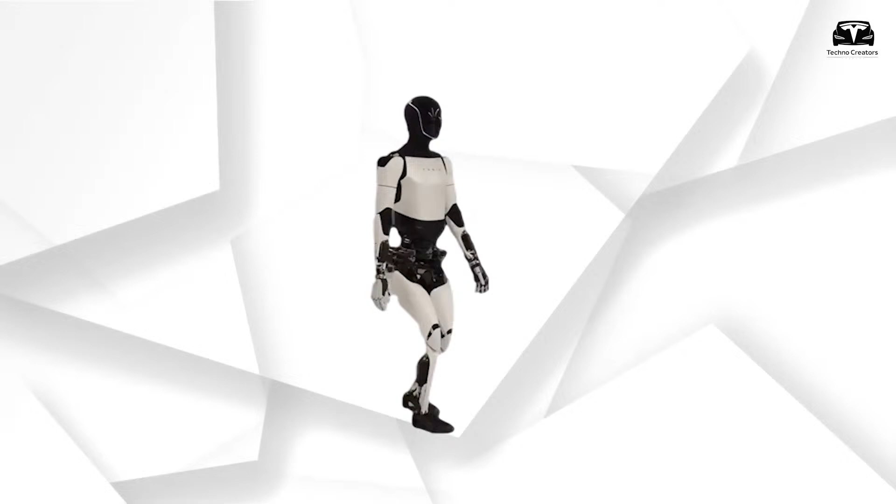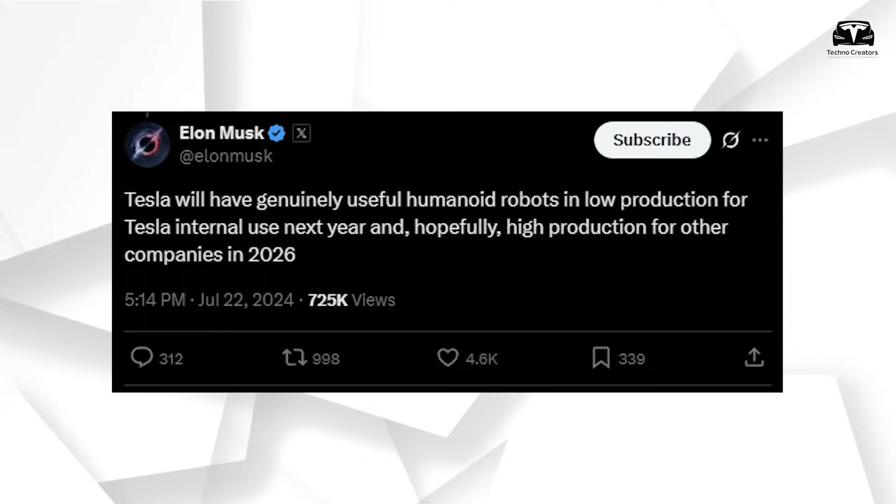Tesla Bot Optimus, an ambitious product with the potential to be a financial game-changer for both Tesla and the entire market, is continuously touted by Elon Musk, who confidently claims it will be available for sale by the end of 2025 and speaks optimistically about mass-producing robot legions. However, harsh reality seems likely to limit this goal. When will Tesla actually be able to begin mass production of the Tesla Bot?

In today's episode, we will reveal 3 major reasons why Tesla is being forced to delay mass production, and the truth behind the scenes. And welcome to Techno Creators.

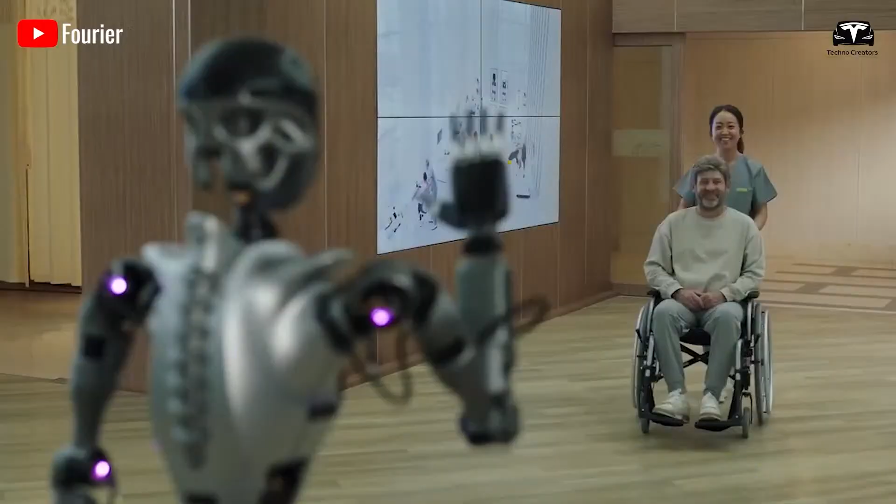The new hardware cannot be produced for mass production. Although Tesla's greatest strength lies in hiring the smartest engineers in the world and motivating them to work at an incredible pace. If we go back to 2016, Tesla published a blog post stating that all of its electric vehicles were equipped with the necessary hardware to achieve full self-driving. This meant that owners of those Teslas could expect autonomous trips and eventually even send their cars out as robo-taxis to earn money when not in use. Later, Tesla quietly deleted that post, and now we can see why.

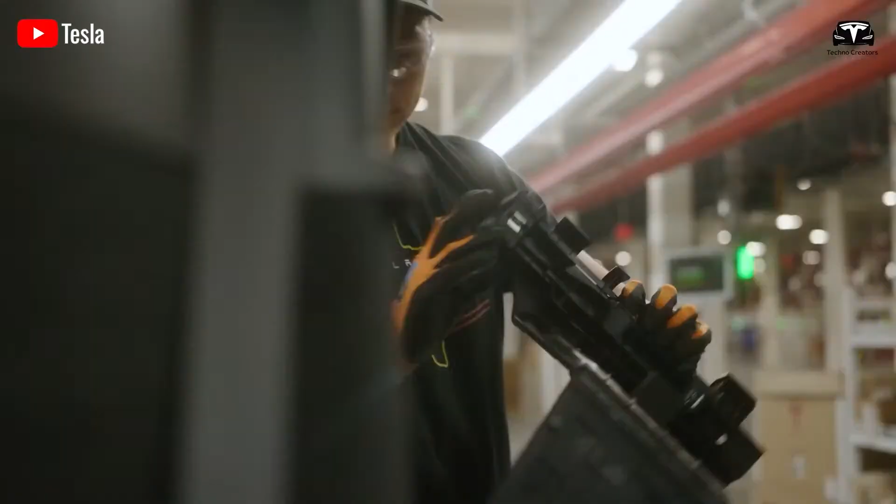Since then, Tesla has shipped millions of updated Hardware 3 computers to replace older Hardware 2.5 systems, as they were not capable of achieving FSD. Now Musk says even those newer chips will also need to be replaced. Meanwhile, the newer Hardware 4 computers have been experiencing short-circuit issues, which have led to large-scale recalls in both the United States and China due to related symptoms such as malfunctioning rear-view cameras.

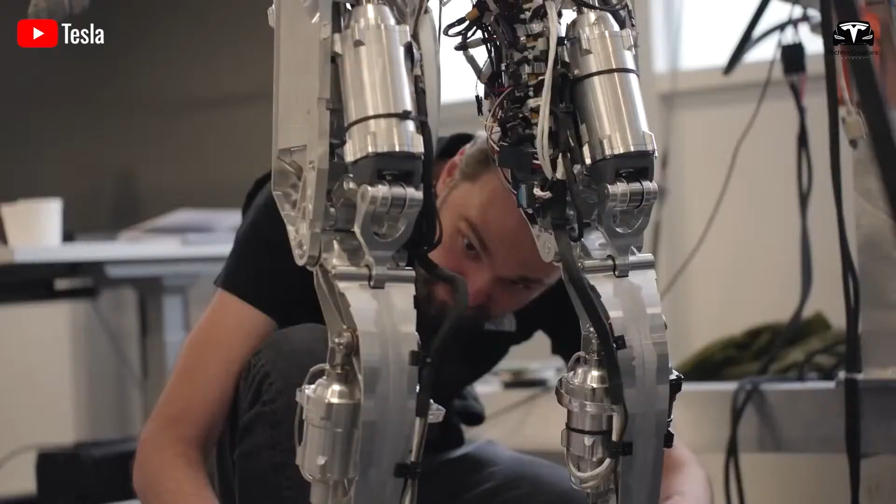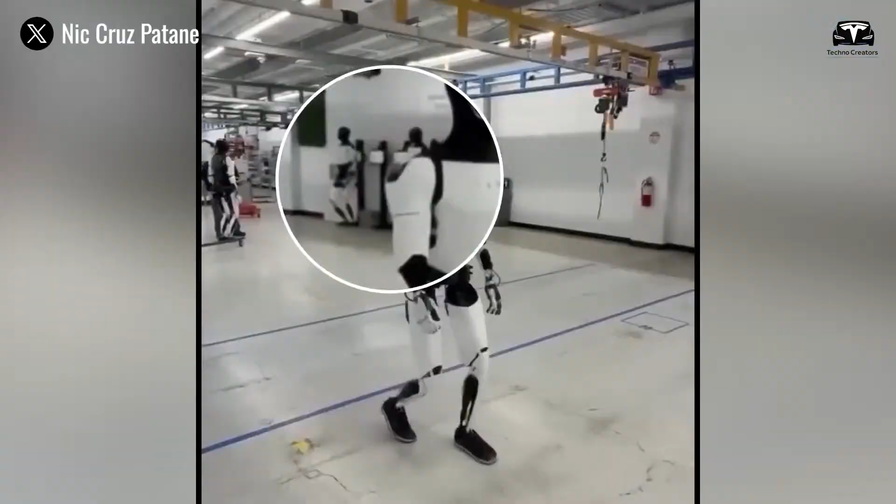Currently, the company is developing Hardware 5 for the Optimus robot. Tesla's 50,000 GPU training cluster at Giga Texas, named Cortex, has enabled a breakthrough in the computing hardware equipped on Optimus, with major improvements in safety and comfort thanks to 4.2 times more data, higher resolution video input, a 2 times reduction in photon-to-control latency, and a redesigned controller, among other enhancements.

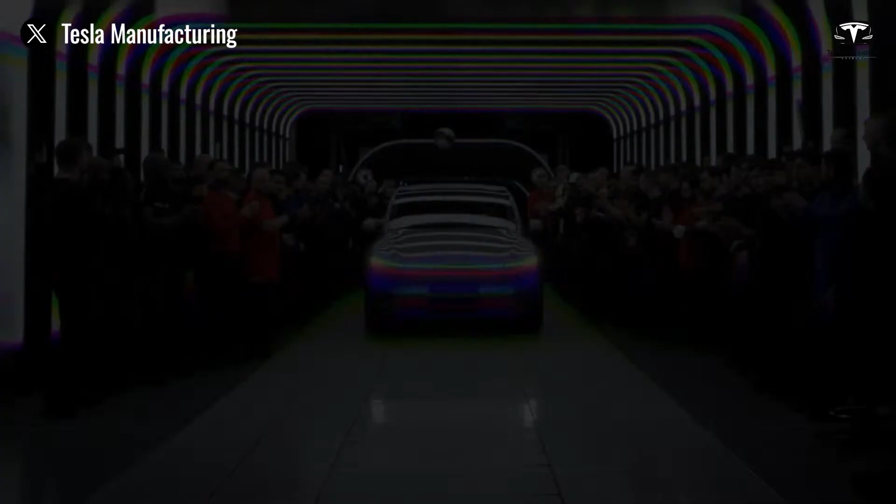Mass producing this hardware for Tesla Optimus is no easy task. Tesla still has many ambitious plans for its electric vehicles, especially the upcoming Model 2, which will require a significant amount of hardware dedicated to self-driving capabilities. The new hardware developed by Tesla specifically for Optimus is expected to be manufactured using a 7-nanometer process and will serve multiple functions, including autopilot and full self-driving.

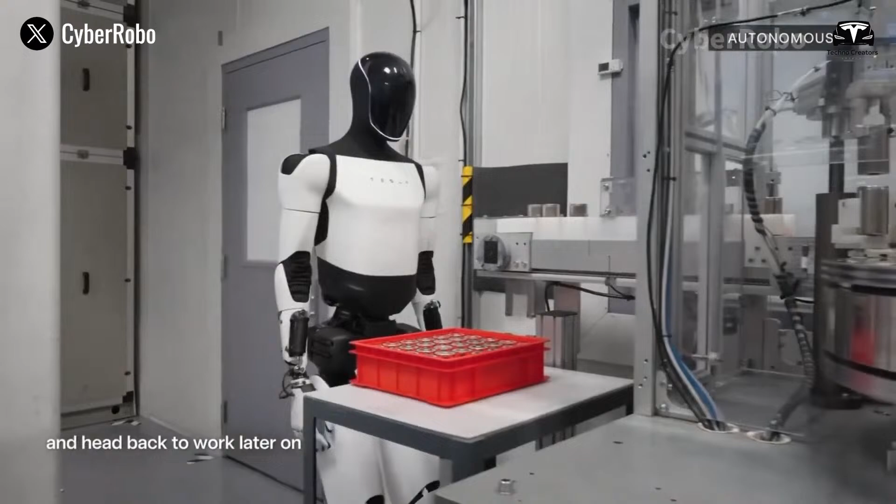Additionally, Musk has stated that while Hardware 3 was revolutionary, Tesla has been working on a next-generation chip that will be approximately 3 times more powerful than Hardware 3. He later mentioned that this unreleased chip is expected to enter production in about 2 years. As a result, the mass production of the Optimus robot may be delayed until 2026, or even 2027.

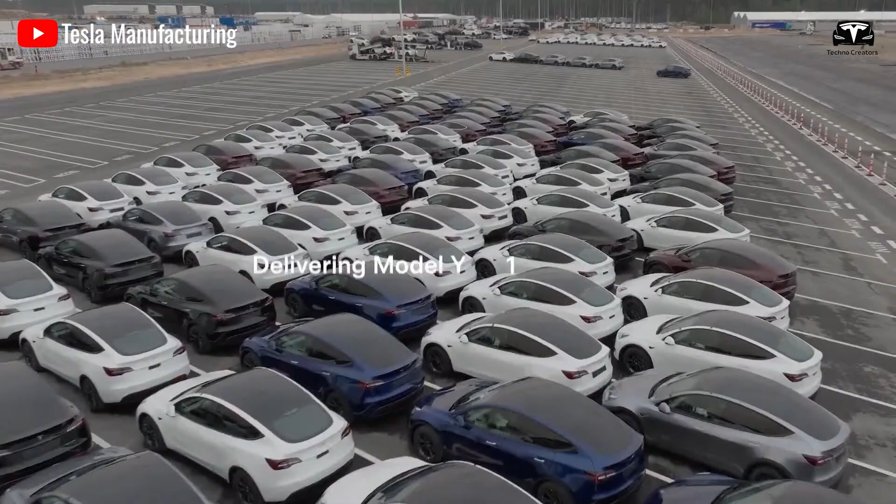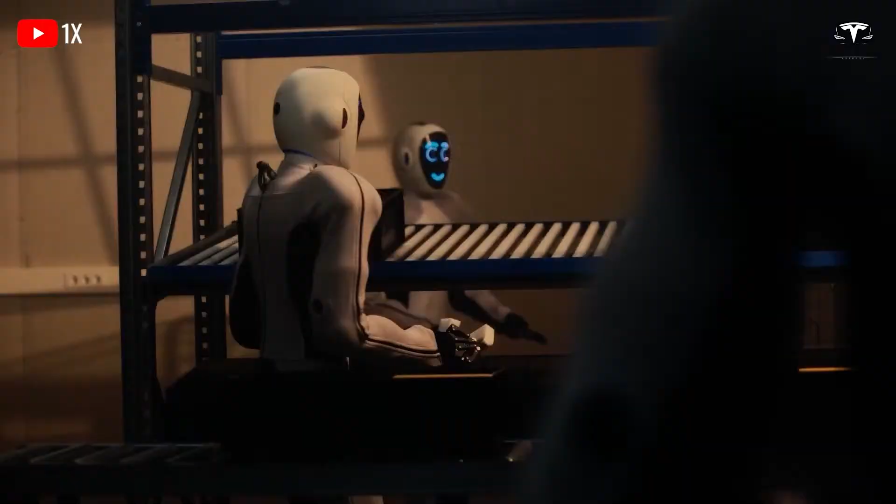Production cost challenges. Recently, inflation in the United States has continued to rise, significantly impacting the overall economy, and particularly the high-tech manufacturing sector. One clear example of this impact is Tesla's struggle to realize its goal of bringing the humanoid Optimus robot to market at a price of just $20,000, a figure once considered ambitious yet achievable.

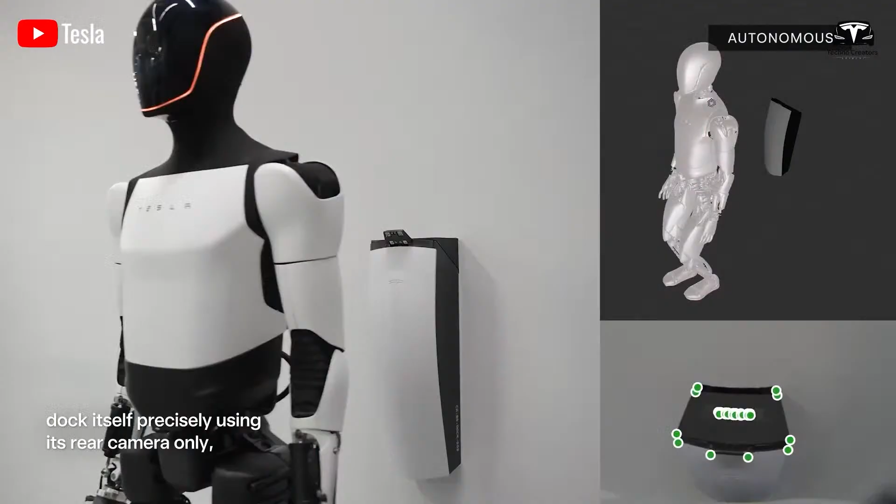Like many other manufacturing companies, Tesla is grappling with rising costs of raw materials, from rare metals used in actuators and sensors to the growing expenses of shipping components from suppliers around the world. Although the company has heavily invested in localizing production and automating its manufacturing lines, macroeconomic factors like inflation remain formidable obstacles.

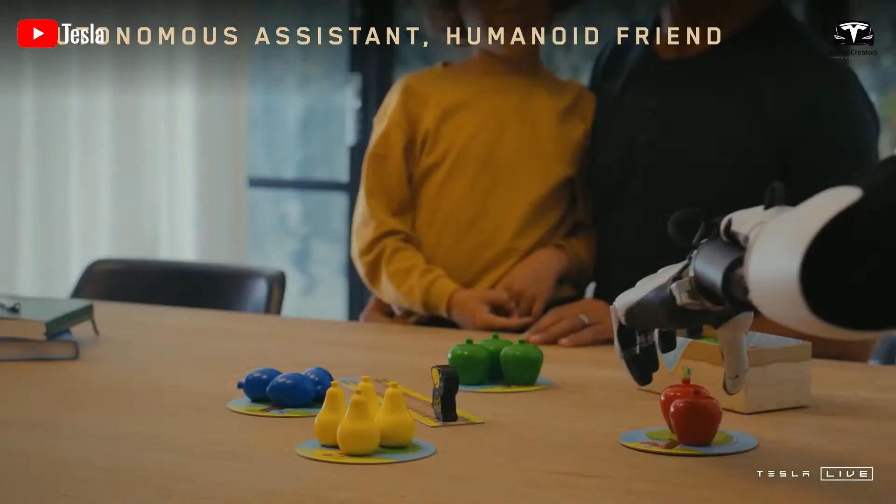Tesla Optimus humanoid robot is expected to be a groundbreaking advancement in robotics and automation. Elon Musk has repeatedly stated that Tesla's goal is to produce Optimus at a cost of just $20,000, a price point that could make the robot widely accessible in everyday life, from manufacturing and logistics to personal care.

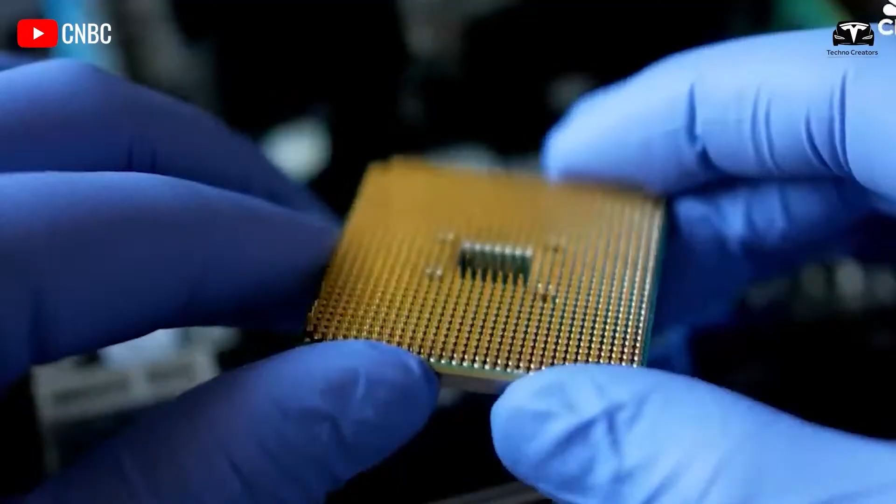However, in the current inflationary environment, that price target is becoming more difficult than ever to achieve. The costs of electronic components, AI processors, high-density batteries, and servo motors, all essential parts for operating a humanoid robot, have risen significantly. Additionally, labor costs in the U.S. are also climbing to keep up with the rising cost of living, further driving up domestic manufacturing expenses.

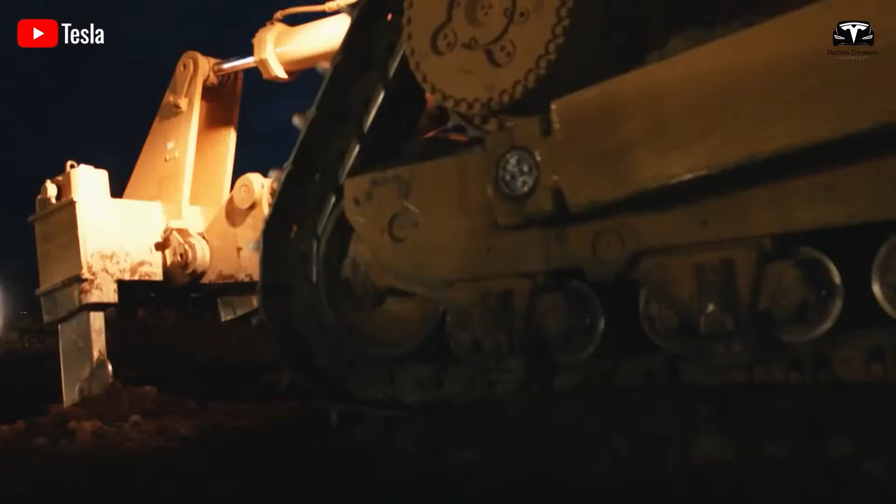Tesla has been expanding its manufacturing facilities in the U.S., such as Giga Texas and Giga Nevada. These factories are not only producing electric vehicles, but are also expected to serve as future centers for the development and assembly of the Optimus robot. By establishing its entire production line in the U.S., Tesla can take advantage of tax incentives and support from the U.S. government for advanced technology companies.

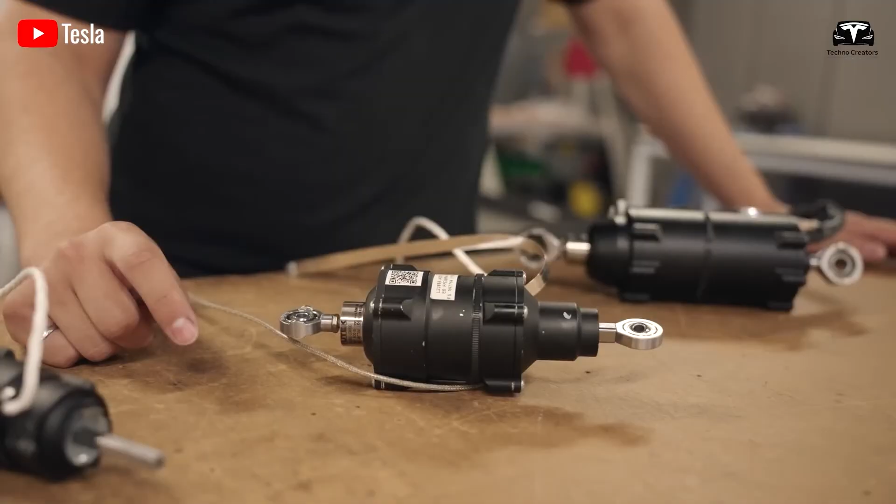Although labor costs in the U.S. are significantly higher than in other countries, Tesla compensates for this by increasing the level of automation in production, using Tesla bots themselves to build an efficient Optimus production line with less reliance on manual labor. Furthermore, signals suggest that both the market and the tax policies set by the government appear to be recovering from previous tensions, making it likely that mass production of the Tesla bot could begin as early as the beginning of 2026.

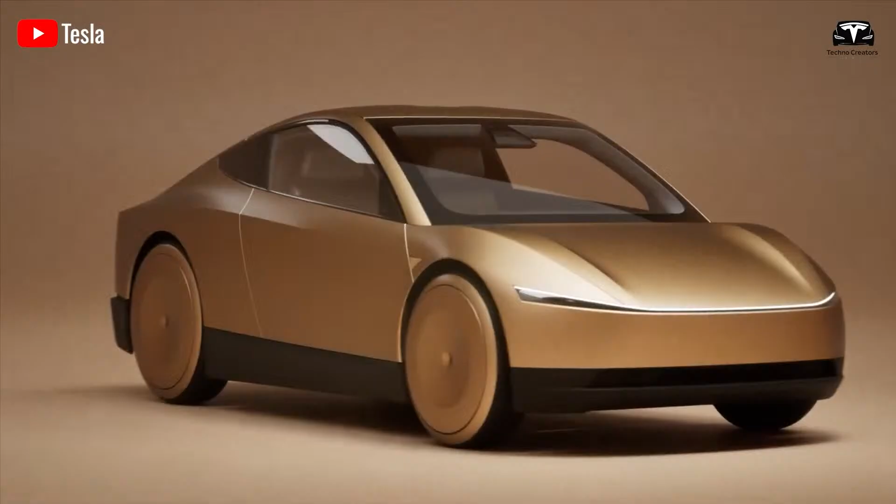Short of autonomous, the final and most important reason that Optimus may not be able to determine a specific timeline for mass production is that it seems to be at a standstill. In other words, the robot's autonomy in its environment has not yet reached the expected level. Over the past few months, Tesla has focused on improving the robot's gait, making it more agile, powerful, and confident in its movement. The robot's movement speed suggests it may be able to reach 3 miles per hour.

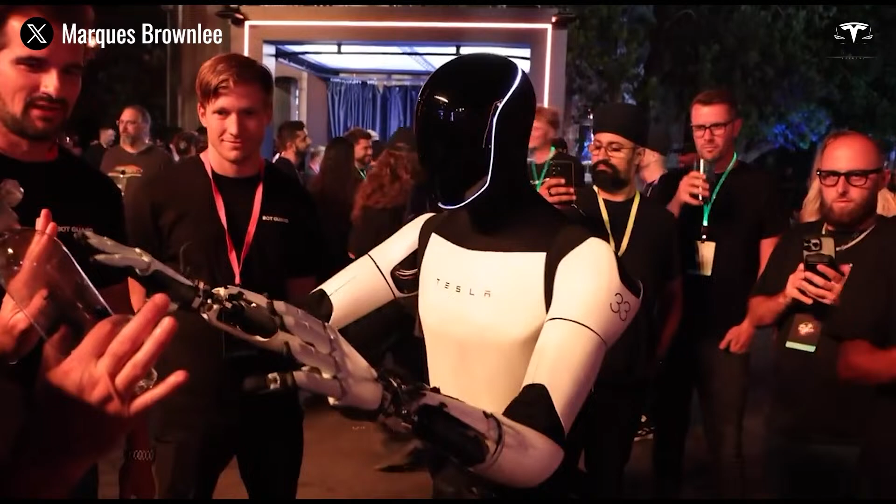Elon Musk's latest event seemed to promise a bold future, unveiling Tesla's ambitious cybercab and the humanoid Optimus robot at the We Robot launch. At the event, we witnessed Optimus robots showcasing impressive interactions, engaging with guests by socializing, serving drinks, and even playing games like rock, paper, scissors. Just 2 years ago, these robots were like shy wallflowers, unable to take the stage without assistance. The evolution has been remarkable.

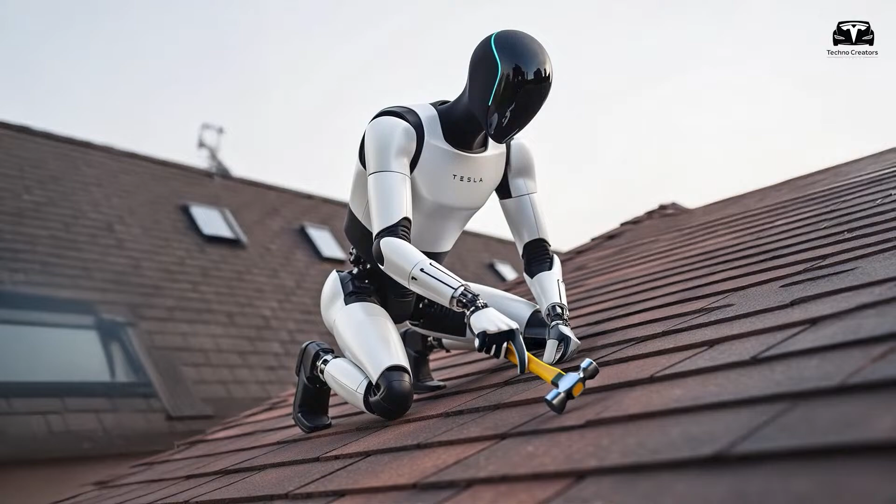On stage, Musk confidently declared that this would be Tesla's biggest product yet, sparking excitement not just for the robot itself, but across Tesla's entire portfolio. However, one of the Optimus robots candidly admitted on camera that it was being assisted by humans and was not yet fully autonomous. This revelation didn't come as a surprise to those familiar with the underlying concerns surrounding the event.

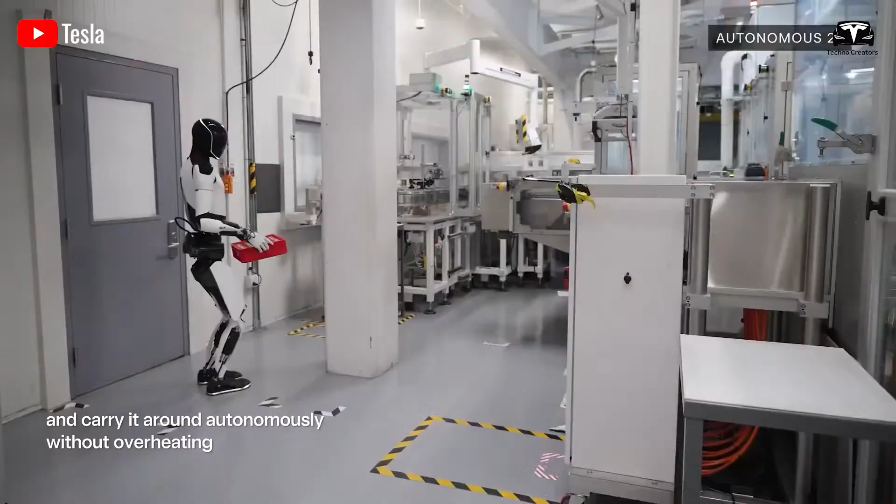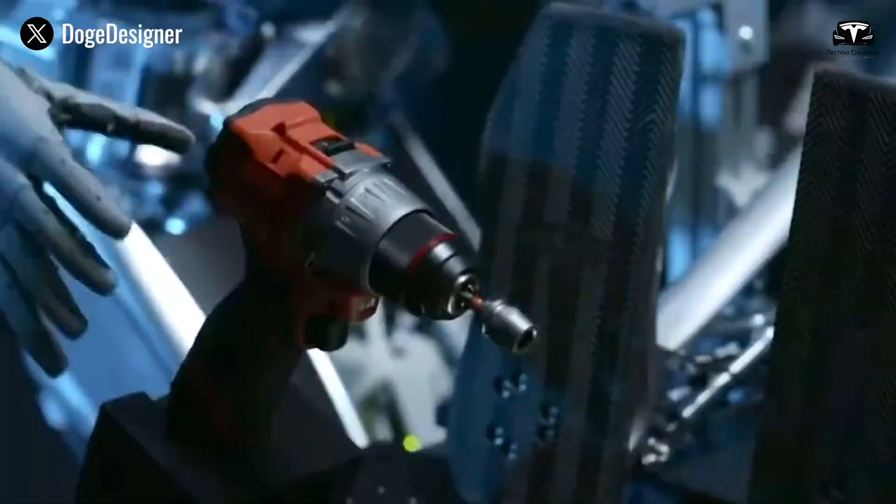There were echoes of previous controversies, especially when Musk had earlier highlighted the robot's progress by showcasing its ability to fold clothes. Observers quickly noticed the obvious presence of human hands in action, undermining claims of true autonomy in the robot's capabilities. Although in the latest update video, Tesla Optimus shows significantly improved mobility, no one yet knows exactly how autonomous the robot is in a factory environment or in daily life. It may have achieved over 50% work efficiency, but the rest remains a mystery.

In 10 years, probably 90% of miles driven will be autonomous. Huh. Wow. That fast.

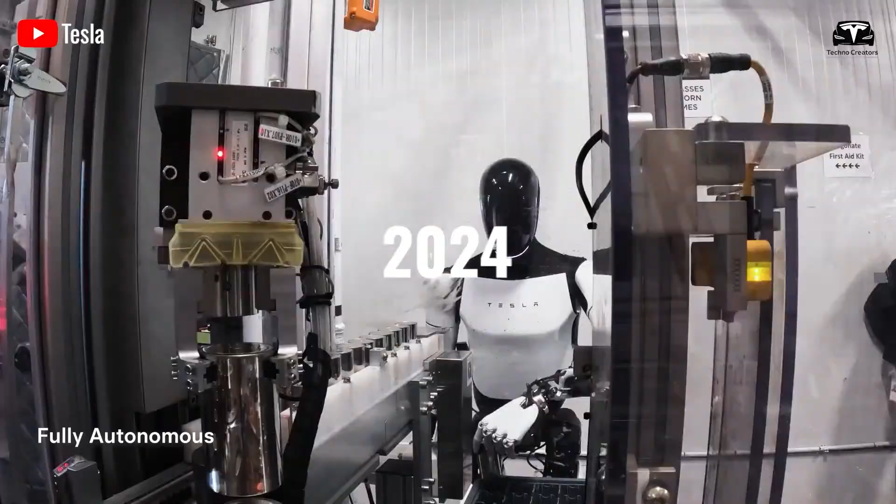According to an internal report leaked at the end of 2024, the actual efficiency of Optimus on the factory line currently reaches only about 40 to 50% compared to a human worker, while the accuracy of its operations when tested is only around 70 to 75% in a standardized environment. When deployed in uncontrolled settings such as homes, offices, or construction sites, this efficiency drops below 30%.

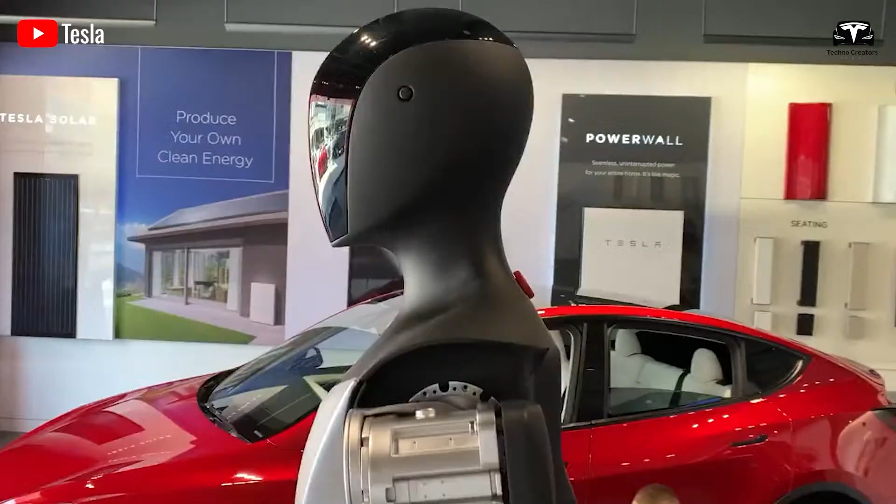Although AI is advancing rapidly, for a humanoid robot like Optimus to achieve true autonomy, it needs not only flexible mobility, but also contextual understanding, natural language processing, dynamic environment management, and continuous learning from real-world data, capabilities that still face many limitations today. In summary, Optimus has tremendous potential, but achieving full autonomy in real-world environments remains a technical challenge that could take many more years to overcome.

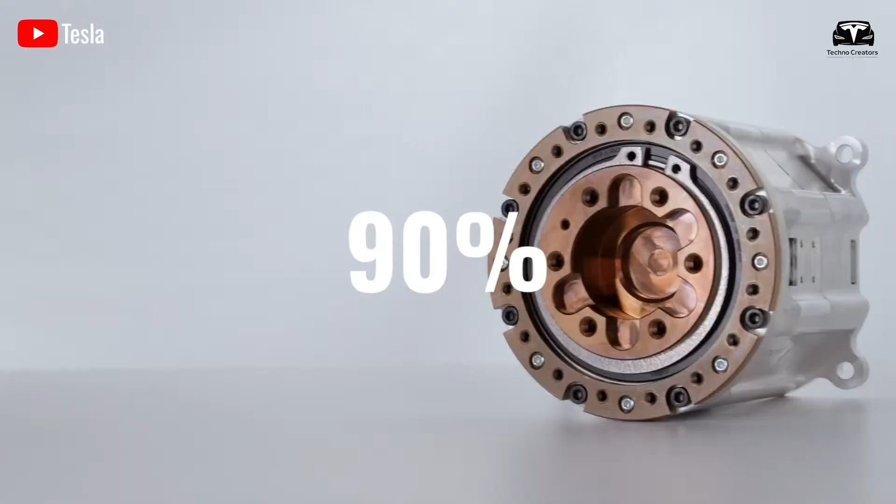Much like Tesla's FSD system, the promise of 90% autonomy for humanoid robots may take a decade to materialize, if not longer. We've long known that Tesla has been using a customized FSD build to allow newly manufactured vehicles at Giga Texas and Fremont to autonomously move from the production line to the delivery lot.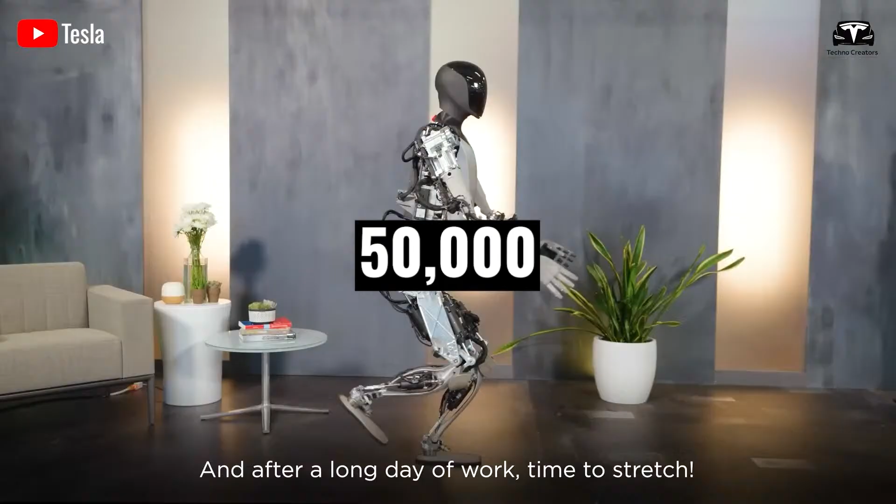Although we know they are using a customized build of what might be FSD unsupervised, Tesla has also confirmed that they have accumulated over 50,000 driverless miles in total from autonomous vehicles moving to delivery lots. This could be the first time a purely general-purpose AI solution for autonomy is being realized.

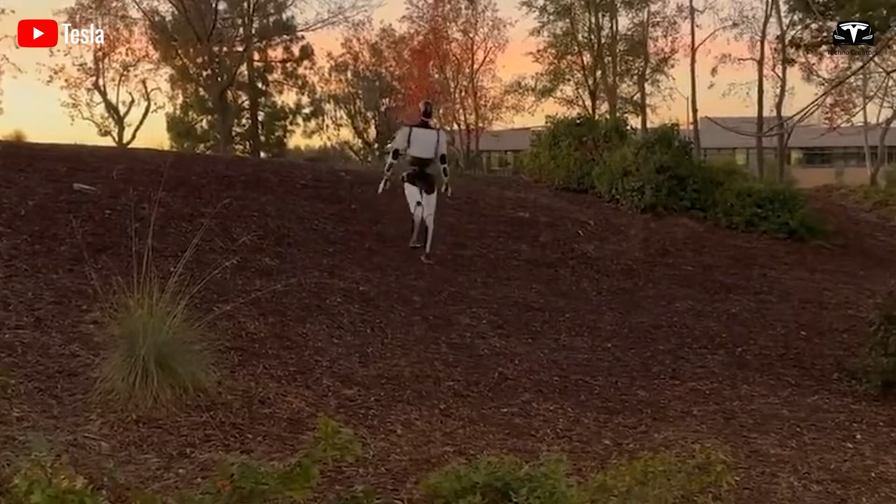Tesla and several executives continue to share more content about autonomy and the Tesla Optimus network. The same level of autonomy will be required for Tesla Optimus to participate in mass production, the ability to move independently to the staging area after completing the assembly and inspection process, all without intervention from remote operators.

How was Tesla Optimus tested at the Giga Nevada factory? Surprisingly, in an interview, a former Tesla engineer revealed that the Tesla Bot Optimus Gen 3 is performing tasks daily inside the Nevada factory, which is known for its large-scale 4680 cell battery production process used for the Cybertruck, Cybercab, and Tesla Bot.

Optimus seems to be a good fit for this space, with tasks in the factory that need to be automated but would take a long time to accomplish in the old way with robots and automation. This is especially true if Tesla has tasks that are always changing, where nothing ever stays stable.

Humans spend time setting up equipment and programming everything to do something that may only last a few months before the equipment changes. Then people need to go back and redo everything, creating a lot of technical overhead costs. You need to pay many engineers to do a lot of work.

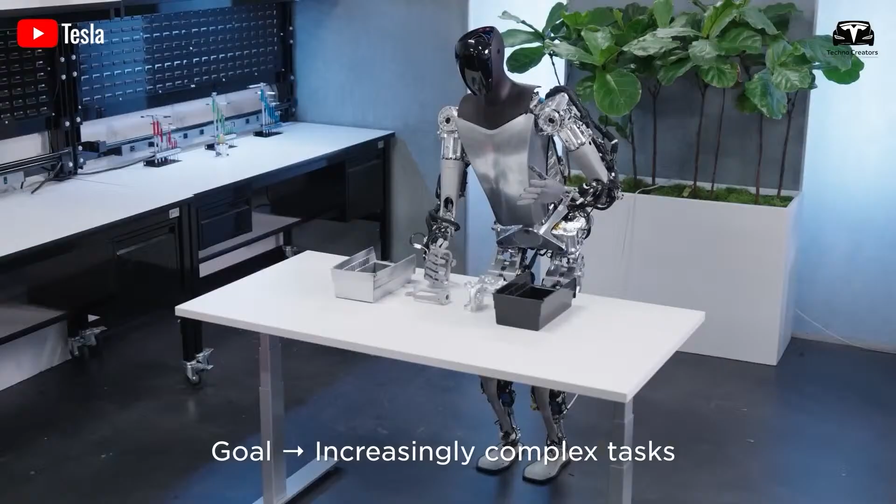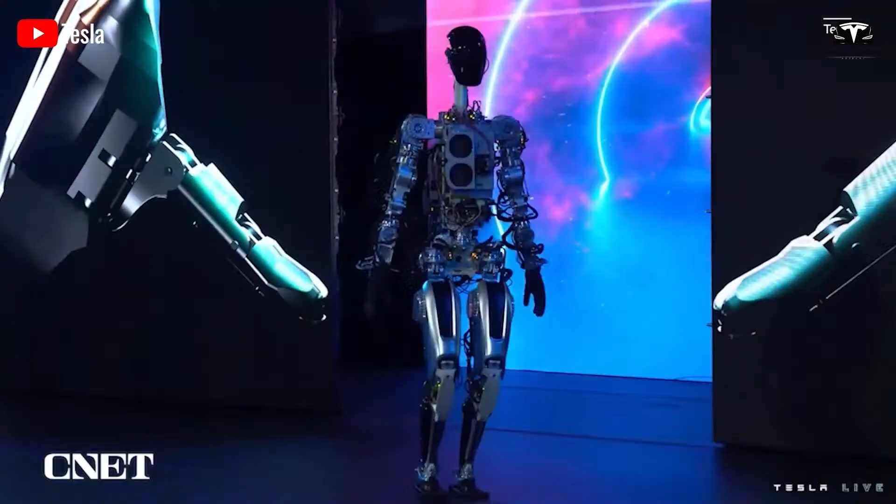If you have a product like Optimus that is more flexible, you can assign a task, teach the task, and have employees teach the robot what they want it to do, as opposed to having an entire team of engineers program devices that allow you to set up and create tasks that can be automated. But this would be too much work for the amount of time the task would take, allowing you to use Optimus to automate those tasks and actually get a return on the time you would spend automating it.

Optimus is already performing tasks in our factory, and we expect to have Optimus production version 1 in limited production starting early next year.

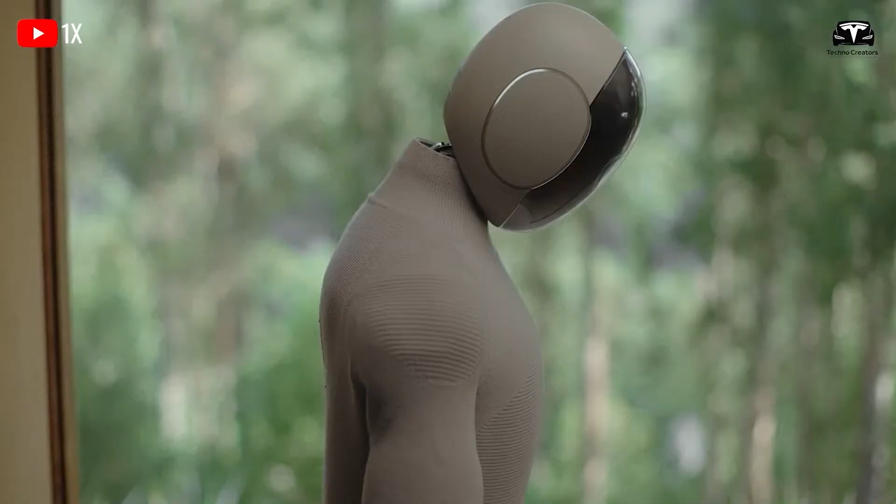In addition, Elon Musk has emphasized that the Tesla bot is performing tasks inside the factory. Although there has been no official statement regarding the specific tasks Optimus is carrying out, previous video footage suggests that Optimus may be performing tasks such as removing batteries from the production line and organizing them into trays. Sometimes the methods of operation need to be adjusted, but everything seems to be handled efficiently by Tesla's team.

But I think we'll literally build a legion, at least one legion of robots this year, and then probably 10 legions next year. And I don't know, it's kind of a cool unit, you know, units of legion. So probably 50,000-ish next year.

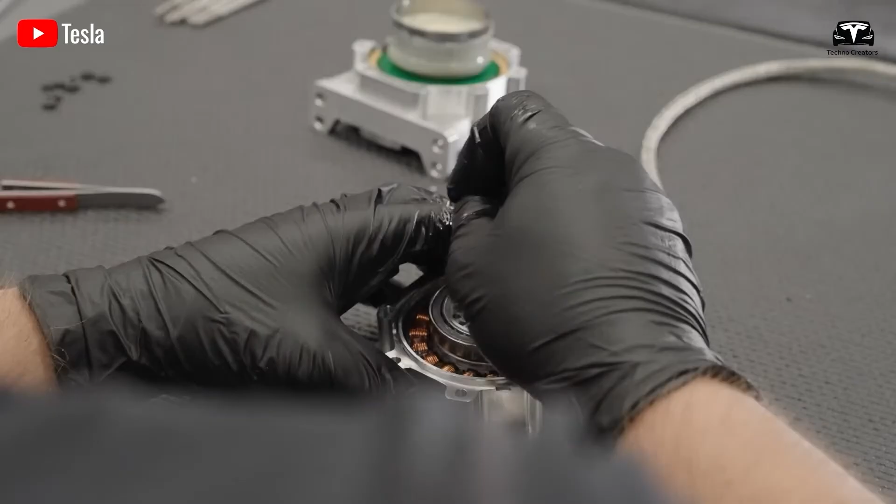Elon Musk has unveiled an ambitious plan during Tesla's Q1 2025 call. Tesla aims to produce its first legion of humanoid robots by the end of this year. This isn't just a major technological breakthrough. With Musk targeting the production of 5,000 Tesla bots in 2025, these robots won't just serve in Tesla's factories, they could also assist with daily tasks at home, in hospitals, and even in emergency situations.

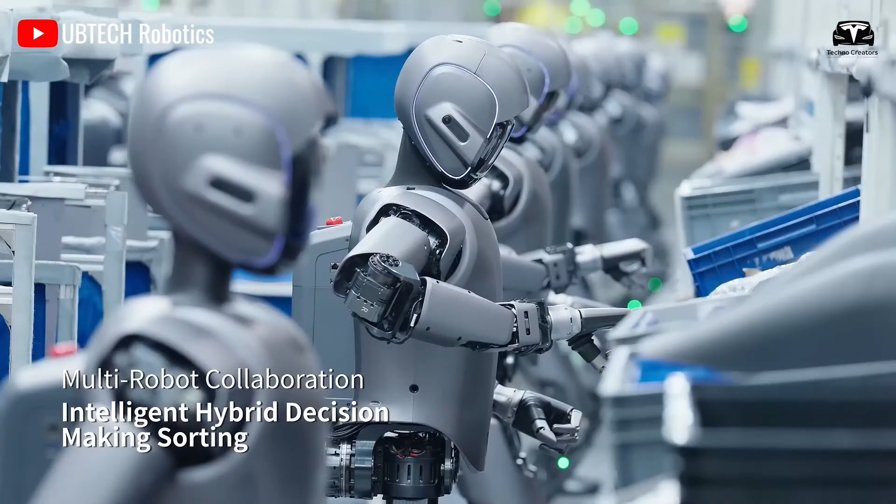These robots are not just machines. They're envisioned as companions, helping hands in every aspect of life, proving they're far more than simple automation. Tesla Bot is barely 4 years old, and its journey has been nothing short of extraordinary. What started as a person in a robot suit has now evolved into a fully functional machine, equipped with flexible movements and advanced algorithms that allow it to think, adapt, and assist.

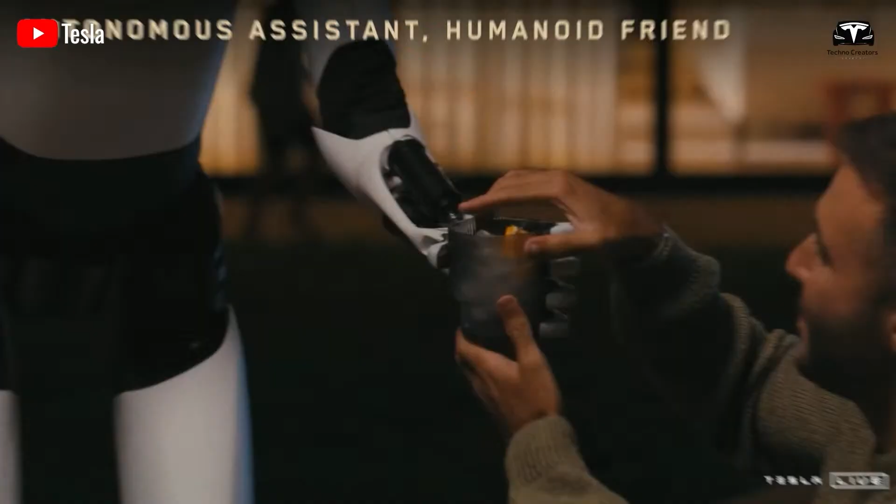From supporting people in daily life to providing care for the elderly and disabled, Tesla Optimus is being recognized not just as a robot, but as a future caregiver, perhaps even the one helping take care of your better half in old age. We often compare Optimus to humans, a rather tough standard, considering that at the end of the day it's still just a machine. It hasn't yet surpassed the agility or responsiveness of a human being.

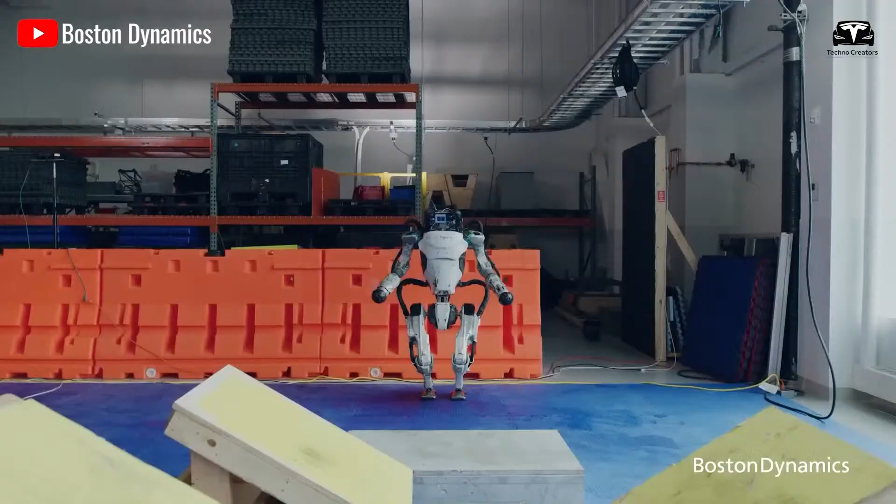But thanks to artificial intelligence, its ability to process and think has already reached levels beyond ours, while still remaining under our control. When we look at the big picture, Boston Dynamics has spent over 3 decades developing robots, yet their creations still mainly focus on running, jumping, and acrobatics.

Similarly, some humanoid robots from China share the same traits. They can perform flips and run smoothly without stumbling.

But what sets Tesla's robot apart is its ability to perceive the world more realistically, using a system of 8 sensor cameras without relying on radar, LiDAR, or any other scanning technology.

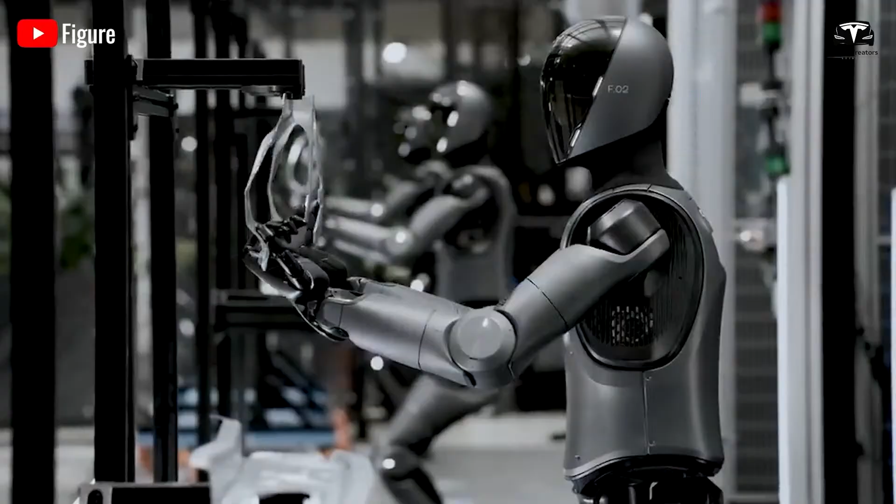What is even more fascinating is the way Tesla is testing Optimus. What are these breakthrough technologies that are about to be unveiled?

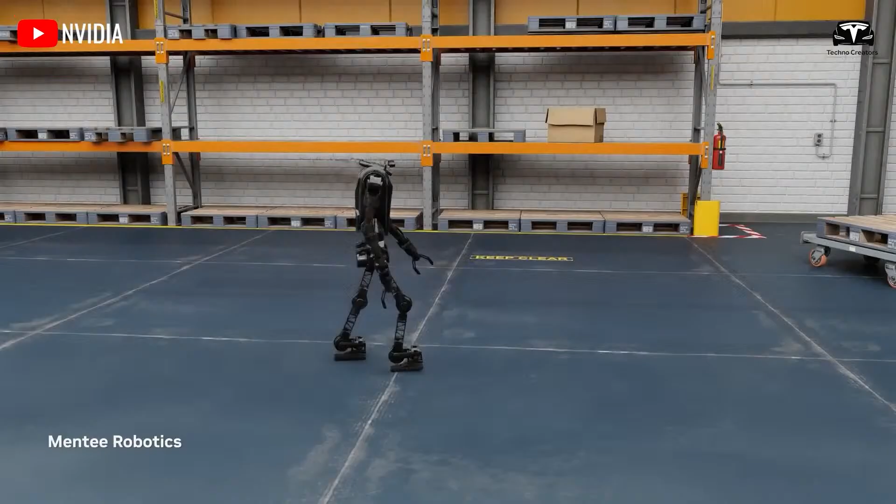If we've ever discussed why Tesla chose not to use LiDAR in combination with a camera system for Tesla Optimus, some believe the decision stems from LiDAR's relatively large size and increasingly high costs. However, the tech world never stands still, and some suppliers now have the capability to produce an entirely new kind of LiDAR device, weighing and measuring as little as 7 millimeters.

These compact sensors, developed by RoboSense, can be integrated into robots and manufactured at a cost of just $499.

Back to Tesla Optimus, as shown in the recent video navigating rough terrain, the robot demonstrates impressive flexibility and balance control, even when going uphill or downhill.

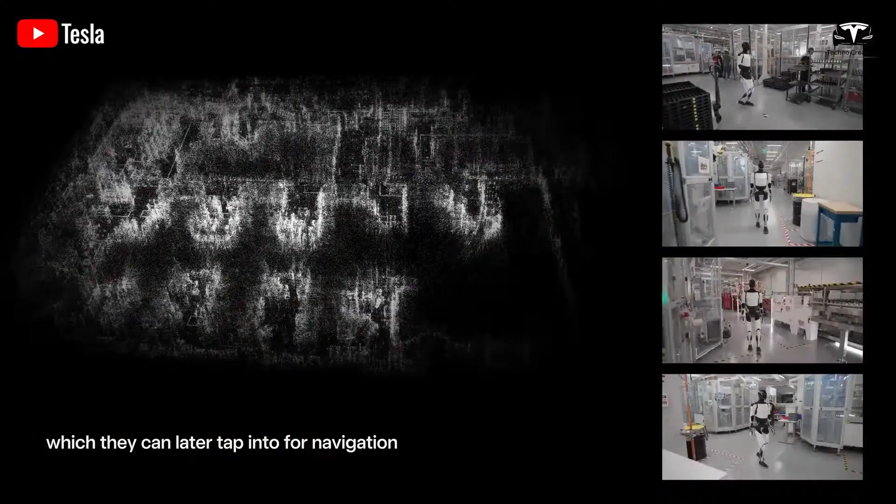What's most fascinating is that Milan Kovac, Vice President of Engineering for Optimus, explained exactly what it took to get Optimus to this point. The robot is genuinely progressing in its ability to walk and can maintain balance on uneven ground, even while walking blind.

Tesla has achieved this using only sensors, all powered by a neural network running on embedded computing hardware. And here's the key question: what kind of sensors did Tesla use that allowed the robot, without a traditional camera setup, to accomplish this?

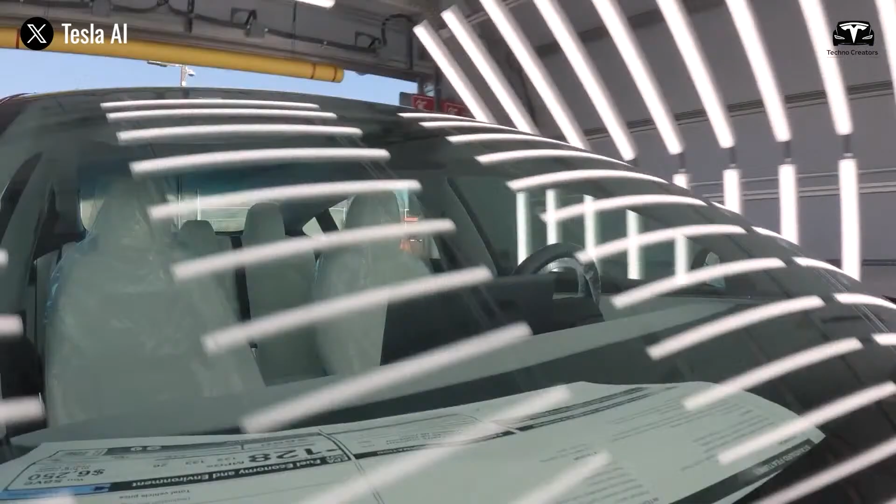The answer could very well be LiDAR, one of the technologies Elon Musk himself once deemed unnecessary for Tesla products. Essentially, Tesla is building Optimus from the ground up, relying on as much supplemental data as possible during vision training. This is similar to how they train FSD on vehicles by using LiDAR rigs to validate the accuracy of their vision system.

This approach proves that Tesla does in fact see value in compact LiDAR sensors for Tesla Optimus. The LiDAR sensor we are referring to is not a traditional rotating mechanical type.

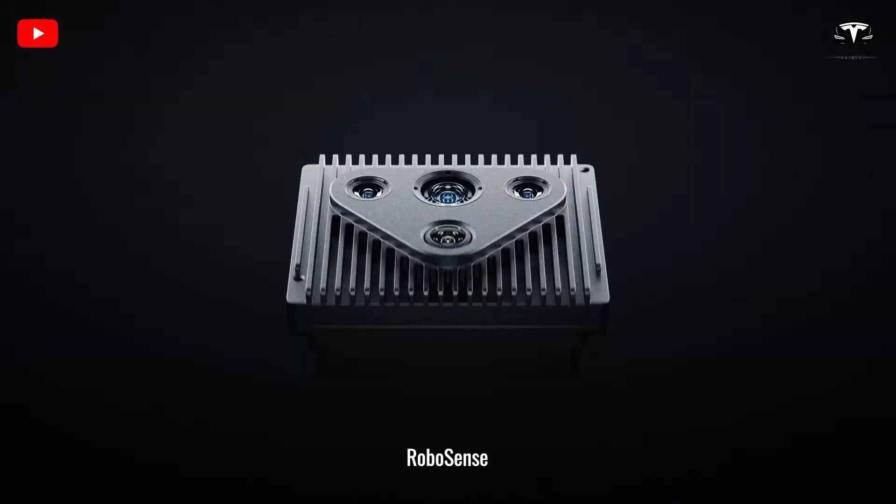It is a fully solid-state LiDAR, equipped with an ultra-wide 120 by 90 degree field of view. It combines high performance, a compact design, and automotive-grade reliability. This enhances the robot's ability to detect object sizes, contours, and distances in real time, making it highly capable in tasks like obstacle avoidance, mapping, and navigation.

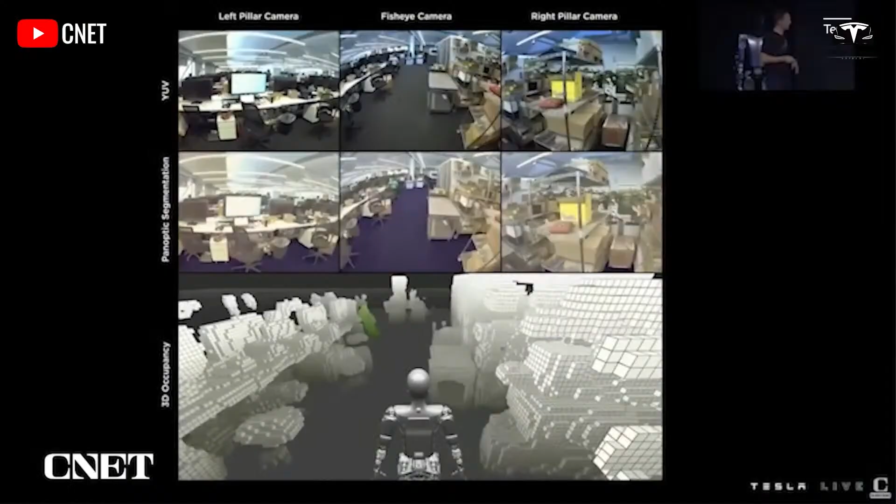This technology promises to provide comprehensive and precise environmental awareness, essential for advanced autonomous navigation and decision-making. With a maximum detection range of up to 75 meters, 7 times that of conventional depth cameras, it represents a significant leap in robotic perception.

Building a realistic surrounding environment becomes more achievable with over 260,000 points per second and 144 neatly structured beams. This allows for precise detection of both static and dynamic small obstacles. It excels in efficient 3D mapping, accurately reconstructing environments such as roads, yards, homes, warehouses, and ports.

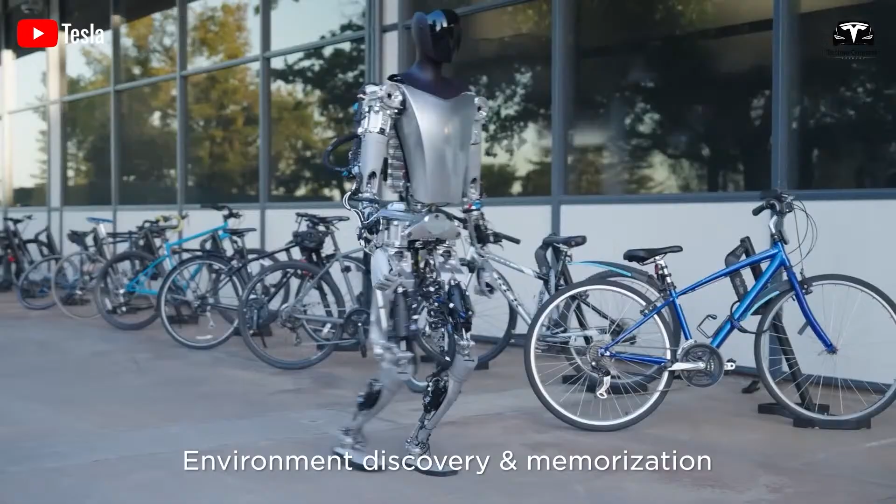To better illustrate the effectiveness of LiDAR technology, we would need a comparison test between Tesla's camera-only autonomous driving system and a LiDAR-based system, such as one powered by Luminar.

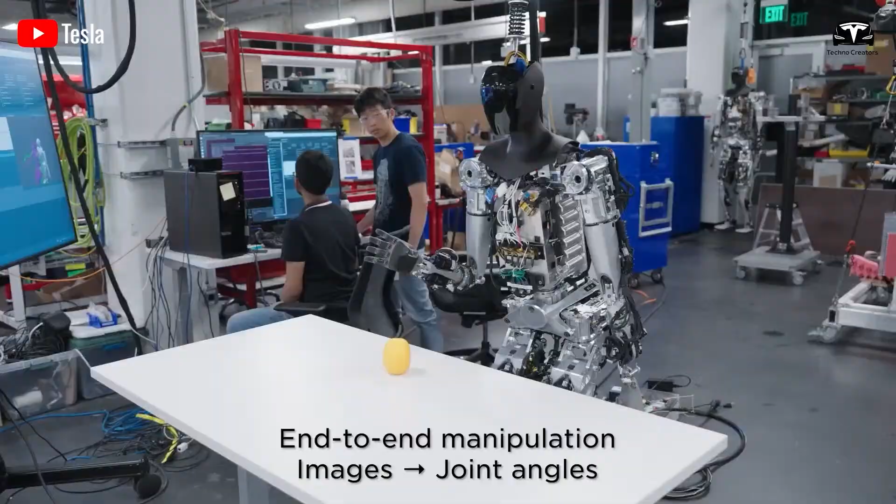The experiment would evaluate how vehicles react when encountering a child on the road under 6 different scenarios: standing still, suddenly running onto the street, in fog, in rain, under bright light, and standing behind a wall. Test results showed that LiDAR generally performed better, mainly due to its superior performance in foggy and rainy conditions.

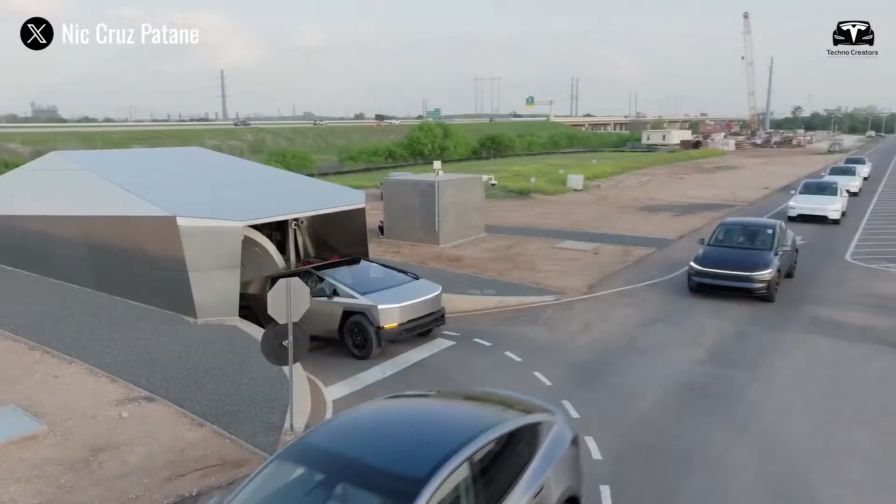There are also some notable drawbacks to vision-only technology. For example, it can struggle when facing bright lights, and Tesla has previously encountered issues with vehicles failing to detect trucks crossing the road, leading to accidents, or confusing overpasses with signs or the sky.

Both of these problems can be addressed by cross-referencing data from multiple sensor types. Relying solely on vision would limit Optimus's working environment and prevent it from performing tasks in conditions involving fog, mud, or dust. What significant update on Tesla Optimus's vision?

All right, it seems that everyone knows Tesla Optimus is equipped with a set of 8 sensor cameras, but perhaps you've overlooked how these camera systems actually work. Remember, Optimus runs on the same overall AI stack as FSD.

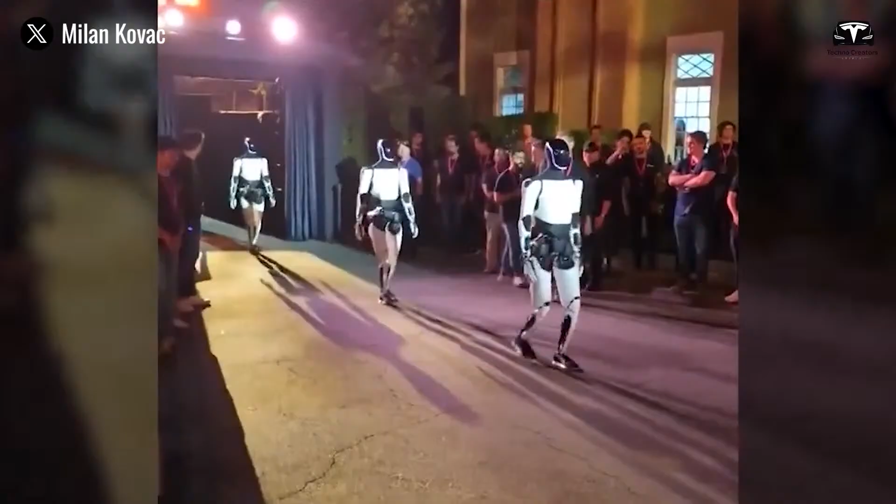In fact, Optimus uses the FSD computer and a branch of the FSD stack for vision-based tasks. The camera array builds a 3D model of the environment with accuracy nearly equivalent to the human eye. Then, the hardware component processes the images captured by the cameras in real time, with a latency of just 0.2 seconds.

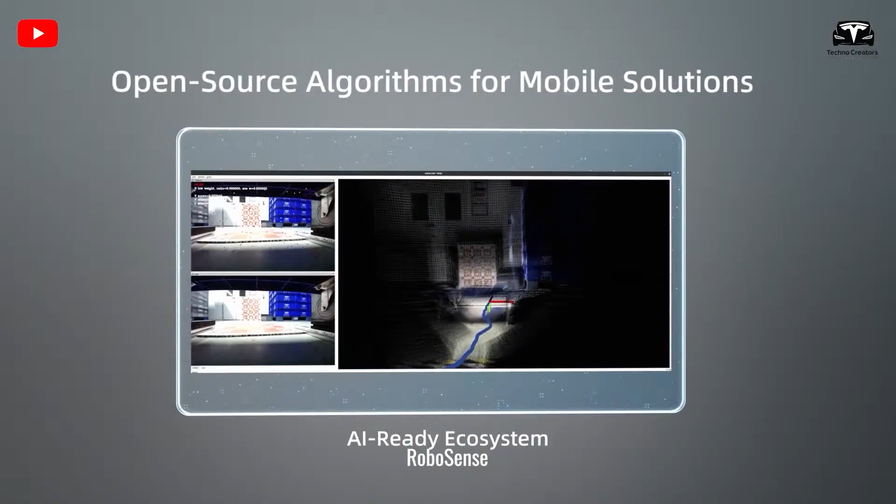That represents a significant leap forward in technology. According to our research, a new 4-camera cluster technology has been developed, integrating multiple sensors to provide a hardware-level fusion of depth information, image data, and motion posture data, all synchronized in both time and space. This enables the robot to capture comprehensive details about its environment, overcome interference from sunlight and highly reflective surfaces, and adapt to a wide range of indoor and outdoor scenarios.

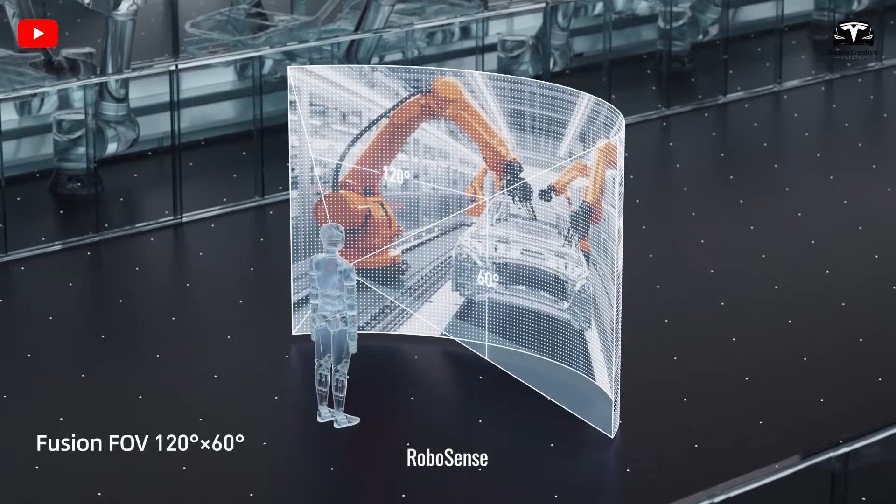With a maximum range of up to 70 meters, 6 times greater than that of conventional 3D cameras, this distance is well suited for a robot designed for indoor tasks, like Tesla Optimus. It breaks the limitations of traditional cameras, delivering superior performance to fully meet the demands of intelligent robots in obstacle avoidance both indoors and outdoors, as well as in mapping and hand-eye coordination. This significantly enhances both efficiency and safety.

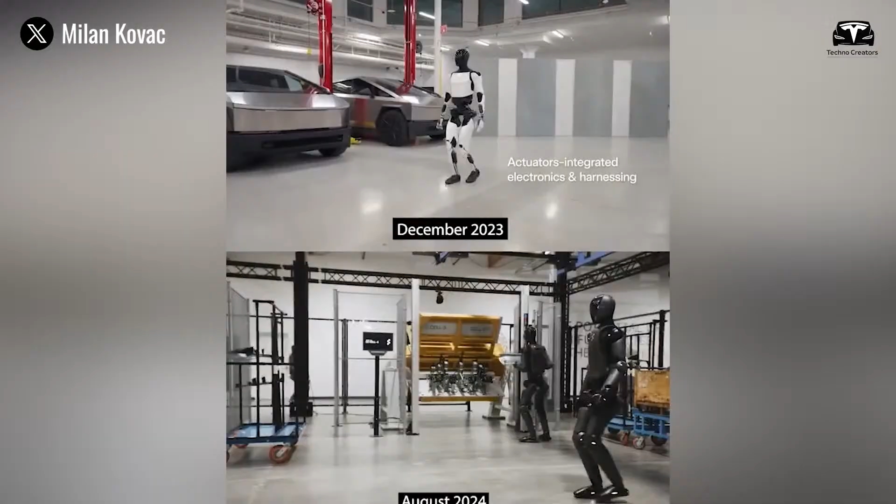Tesla has shown what the robot sees, and it looks very familiar. That's because the neural networks are being pulled directly from autopilot. However, training data must be collected specifically to represent indoor environments and other objects not typically encountered in vehicles. Engineers have trained the neural networks to identify high-frequency features and key points in the robot's camera feed, such as the charging station. Tesla has also utilized the autopilot simulator, but adapted it for use with the robot programming system.

Optimus's torso houses a centralized computer, which Tesla says is designed to handle everything the human brain does, such as processing visual data, making split-second decisions based on multisensory input, and facilitating communication. In addition, the robot is equipped with wireless connectivity and audio support. The reliance on AI and machine learning algorithms enables Optimus to master the automation of a wide range of tasks. This is because it can adapt based on the context of its environment.

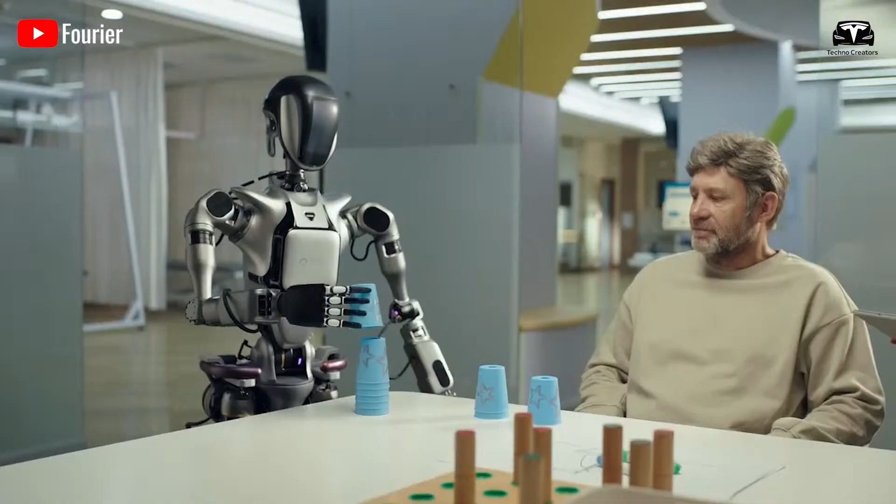In addition, Optimus is equipped with an intuitive navigation system powered by an end-to-end neural network for movement. It has been trained on a library of natural motion references, such as taking a box off a shelf, lifting an object and placing it on a surface, taking medicine out of a container, watering plants, and pouring water. Optimus's fully trained neural network has also been shown to autonomously classify objects by color, continuously learning in the process.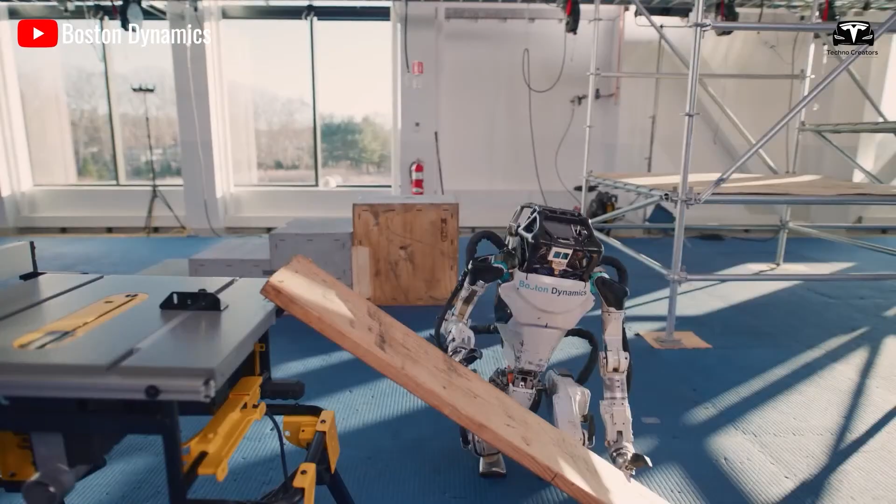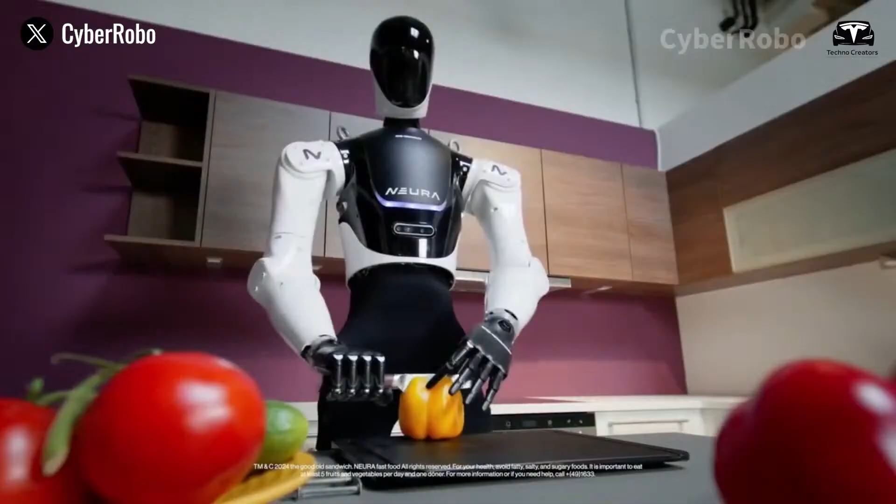Tesla Optimus is often compared to Boston Dynamics' Atlas. While Optimus is designed using aluminum and plastic, Atlas incorporates steel, aluminum, and 3D printed components. It is heavier by comparison and built to operate in more challenging environments, such as construction sites and in search and rescue missions. However, more humanoid robotics technologies are now entering the market, including Figure AI, Unitree, and several other models emerging from the Chinese market, all of which are beginning to draw comparisons with Optimus.

And when can you buy a Tesla Optimus? With the disclosed production cost of $15,000 per Tesla Optimus unit, Tesla may go beyond its initial plans, such as offering rentals at $40 per day or selling them at a higher price to optimize profits, potentially not at the previously stated $20,000. However, shortly after things run smoothly, that is, once Tesla can mass-produce the robots, they will focus on bringing this first lineup into production.

It could turn into an assembly line. If they manage to produce between 5,000 to 10,000 bots in 2025, that would be their current target, ramping up the supply chain. Once they exit the manual production phase and shift into assembly line manufacturing with mass production, building dozens per day, the selling price of Tesla Optimus is expected to gradually drop, possibly even below $20,000.

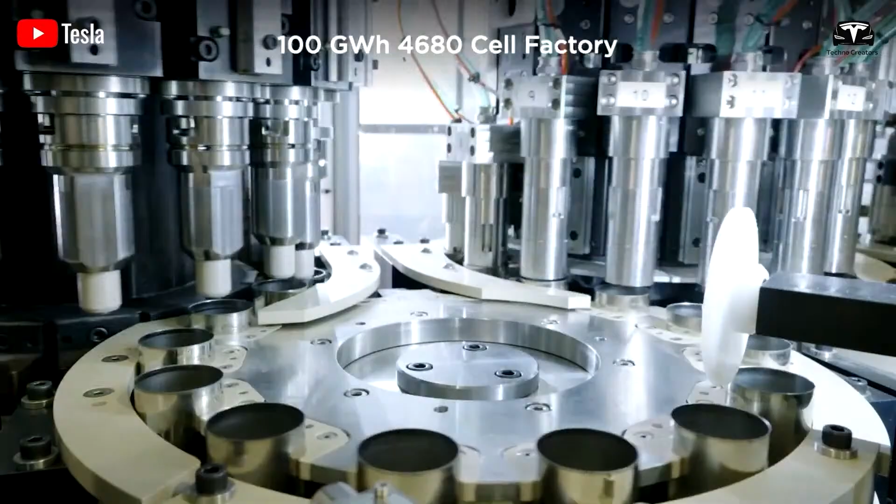Why can they do this? Tesla may produce hundreds or thousands of units, but that represents a different mode for the company. They are leading the way and are currently the best at operating car factories. But then SpaceX is able to produce mini Starlink terminals in their own factory. And if SpaceX can manufacture 5.4 million Starlink terminals per year, then Tesla will be able to produce 1 million Optimus units annually. This is incredible, because it's more than just that. They're similar, as if they're very closely related.

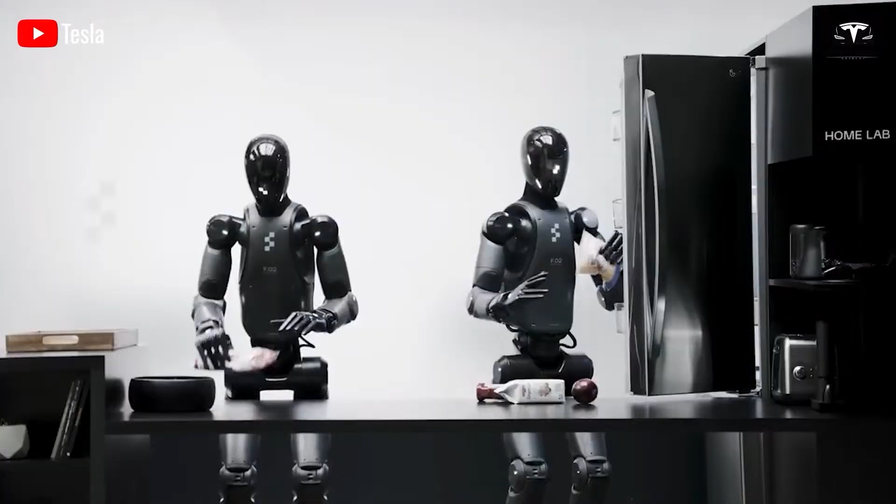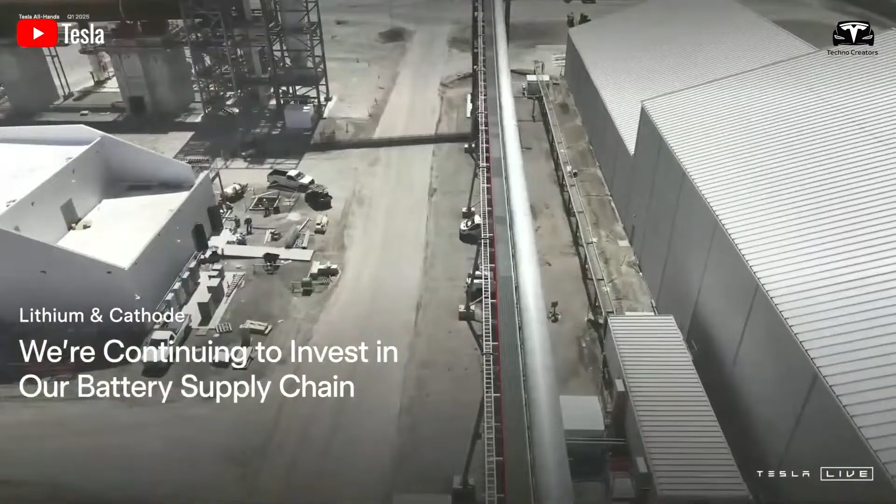In a recent live stream, Elon Musk made some bold statements and shared ambitious predictions for his humanoid robot project. We're not saying everything he says will happen 100%, because, well, it's Elon. But some things are definitely being set in motion. Tesla plans to produce at least 5,000 Optimus robots this year, although he casually mentioned the number could reach up to 12,000. So things are about to get interesting.

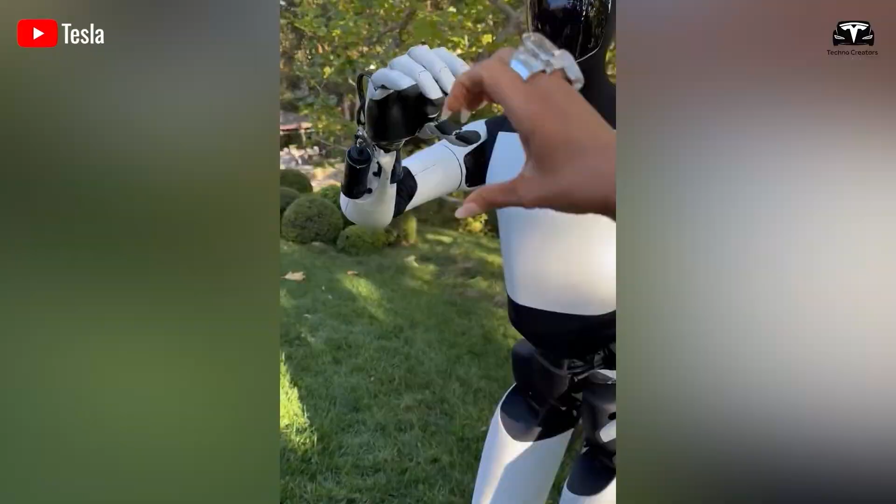The humanoid robot race is heating up, and after closely following Tesla Optimus and the company's progress for some time, it's clear that Tesla holds a significant cost advantage over its competitors. Elon Musk even claimed that Tesla could produce Optimus for just $10,000, which is insane.

On the other hand, Figure AI is also one of the more reliable companies with a clear product development strategy. Their robots are being developed for use in factories and to perform tasks in place of humans, similar to Tesla Optimus. Back to Optimus production.

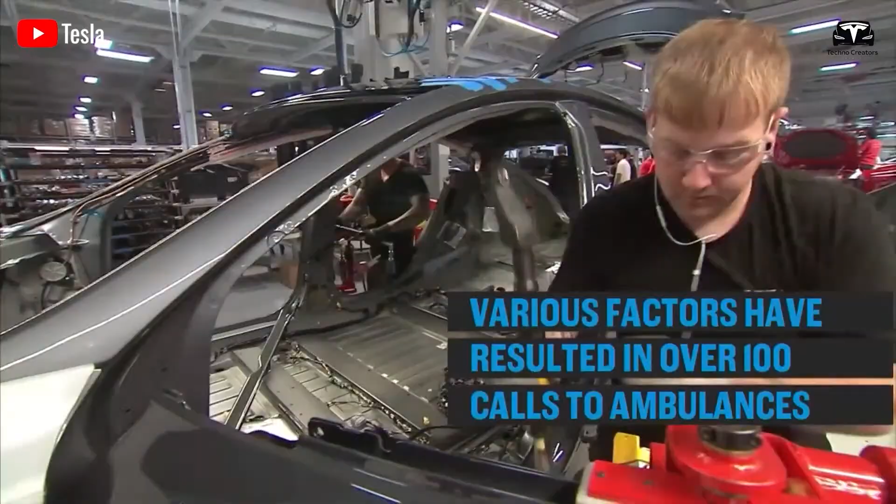As we mentioned earlier, Tesla isn't just building a product, they're pioneering an entirely new industry. This isn't like manufacturing a new phone or car. We're talking about a humanoid robot that requires absolute precision in every component, algorithm, and movement. Unlike with cars, everything from the assembly line to the AI software is being built from scratch, not copied from other existing prototypes on the market.

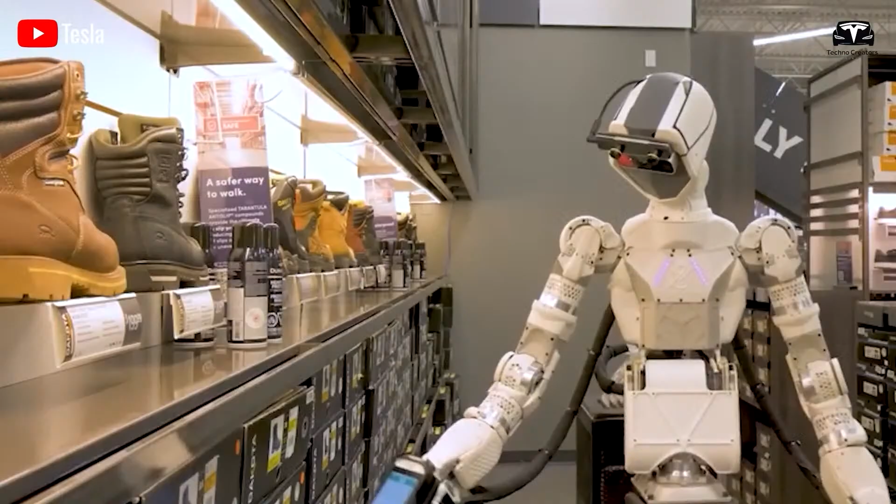If you've seen one of Elon's posts on X, you might remember that he confirmed Tesla will offer Optimus both for rent and for direct purchase. But rental will be the top priority. Why does he prioritize this? Instead of a one-time sale, leasing generates a steady and recurring income stream, monthly, quarterly, or annually. This allows Tesla to better predict cash flow and plan long-term finances.

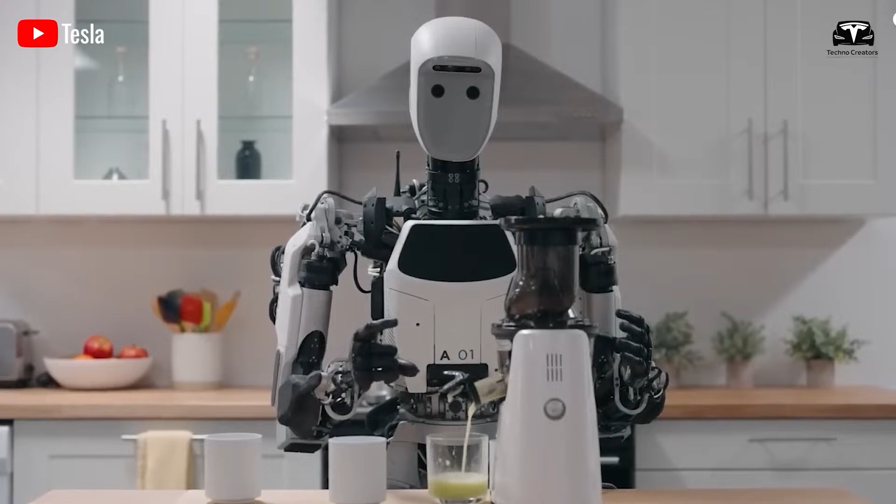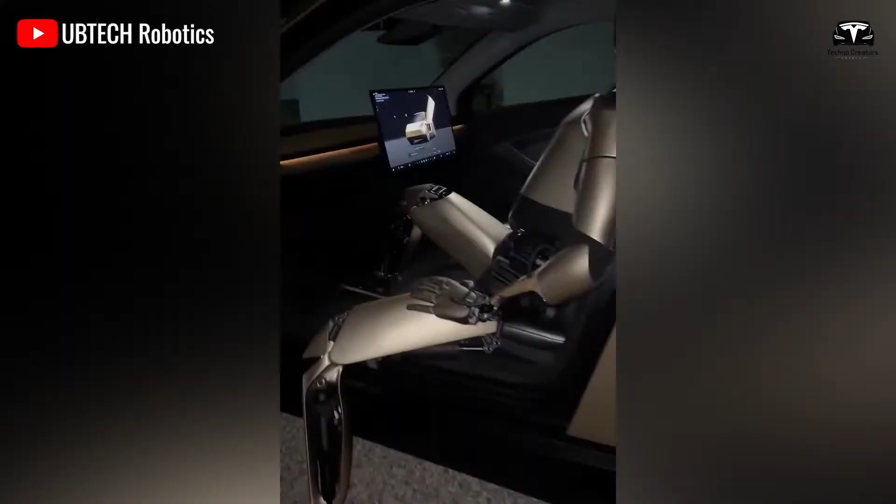Many customers may not want, or be able, to pay a large upfront sum to own a brand new product. Offering rentals at a lower cost makes the product more accessible and expands the potential customer base. In a market where consumers increasingly prefer the use-it-don't-own-it model, like cars, machinery, and tech equipment, leasing becomes a key competitive advantage to avoid falling behind. That said, if you want to personally own a Tesla bot, it likely won't be difficult, especially with a price under 20 grand.

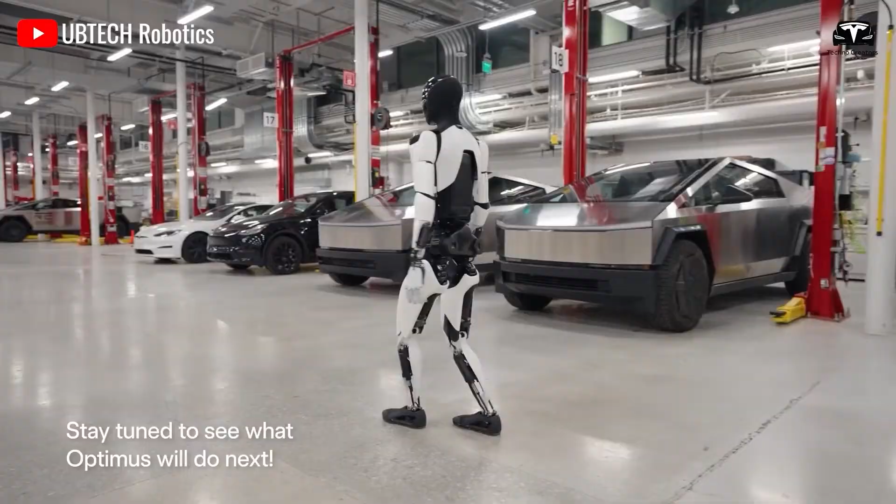What makes the Tesla Optimus so different? While most robotics companies focus on building a smarter AI brain or optimizing walking speed, they often overlook one crucial aspect: the hands. Human intelligence isn't just about thinking, it's about doing. And what is our most powerful tool for shaping the world? Our hands. Every structure, every technology, every complex mechanism we use daily exists thanks to the dexterity and precision of human hands. Tesla understands this.

That's why Optimus is designed not only to be intelligent, but also highly capable. Optimus could be the first robot to truly function like a human, bridging the gap between AI and real-world usefulness. This could be the game-changing advantage that sets Tesla's humanoid robot apart from the rest and brings us closer than ever to the future.

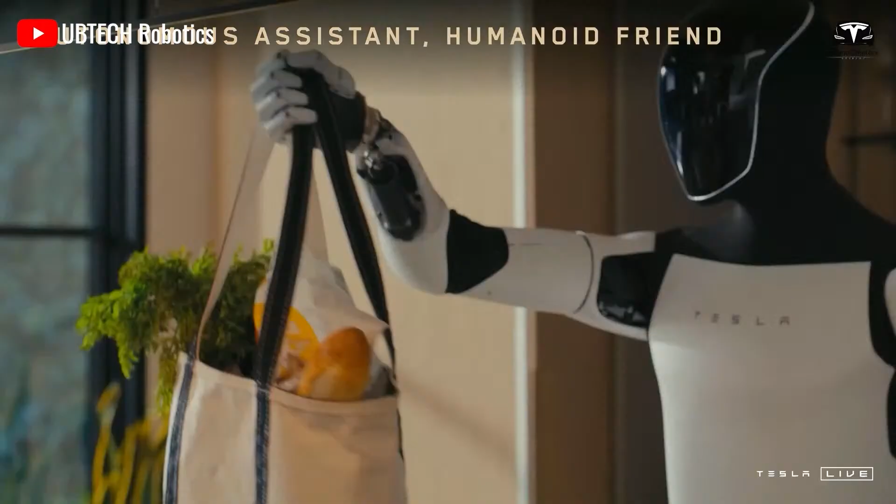Additionally, Musk stated that Optimus will be produced in limited quantities in 2025, with plans to deploy over 1,000 units within Tesla's own facilities, and the potential for production for other companies starting in 2026. Optimus is being trained by the supercomputer Cortex, an AI training supercluster currently being set up on the Tesla headquarters campus in Austin, Texas, to enable what they call real-world AI.